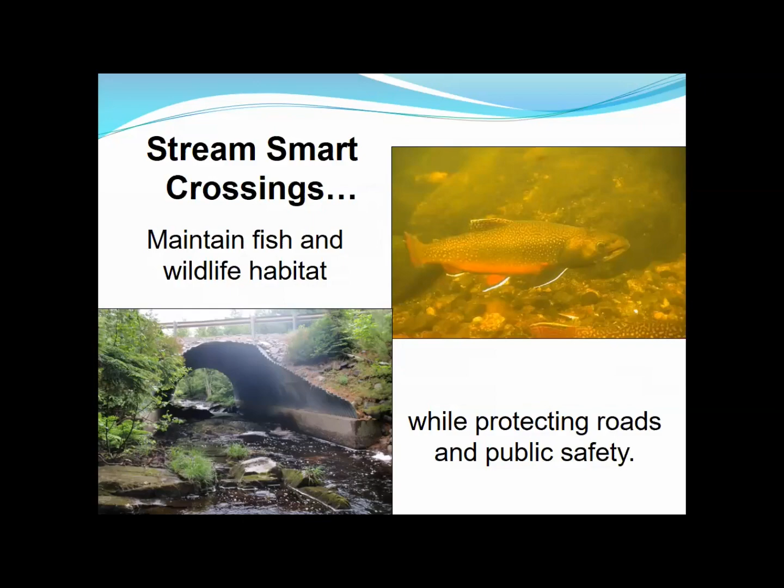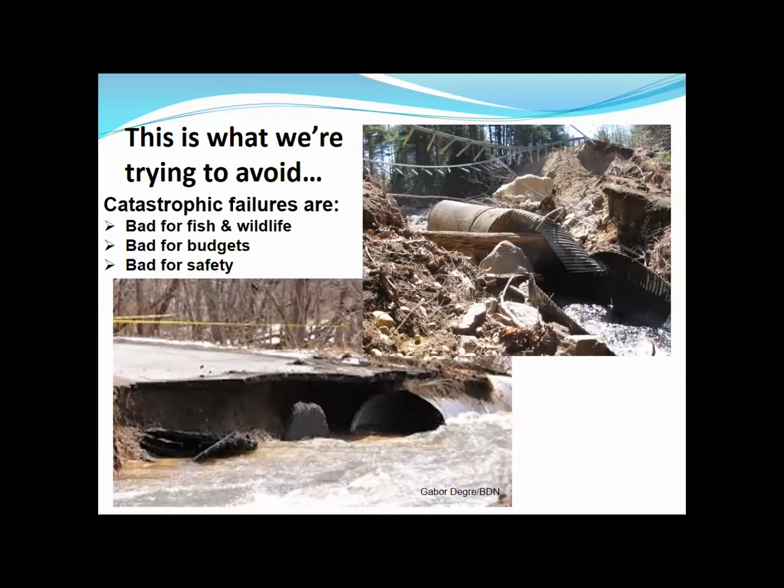By building Stream Smart road crossings, this is what we're trying to avoid. Obviously, road failures like this are bad for fish and wildlife, they're bad for budgets, they're bad for public safety. And unfortunately, the likelihood of failures like this is increasing as large annual storms become bigger and occur more frequently over time.

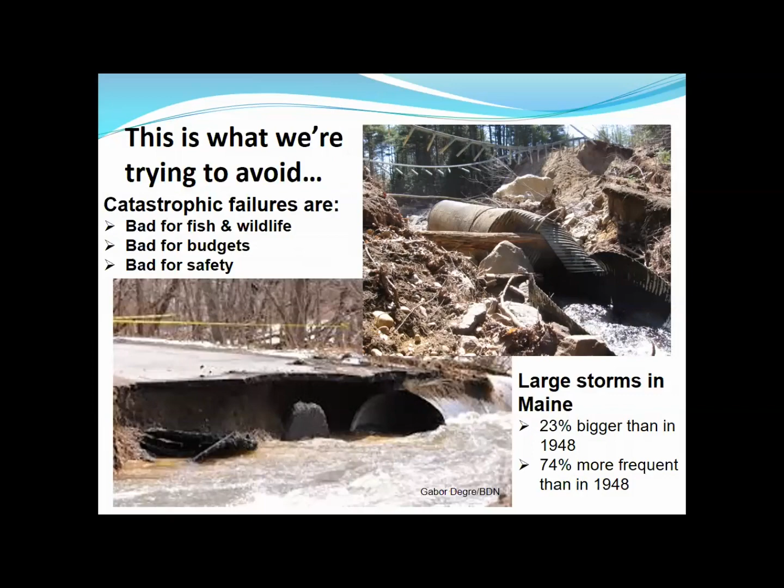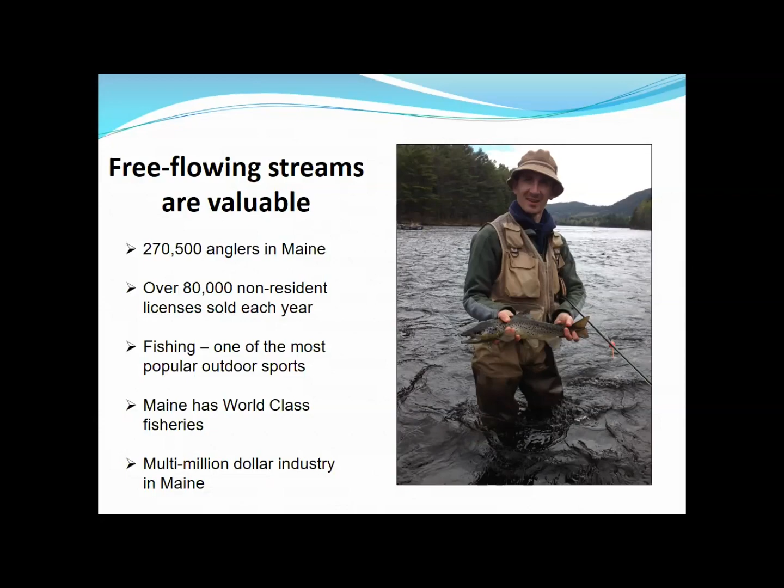Besides avoiding catastrophic road failures, Stream Smart crossings can help us restore free-flowing streams. And free-flowing streams are important for a number of reasons, one of which is fishing. Fishing is one of the most popular sports in the nation, and Maine has world-class fisheries. People travel here specifically to go fishing. Fishing is a multi-million-dollar industry in Maine.

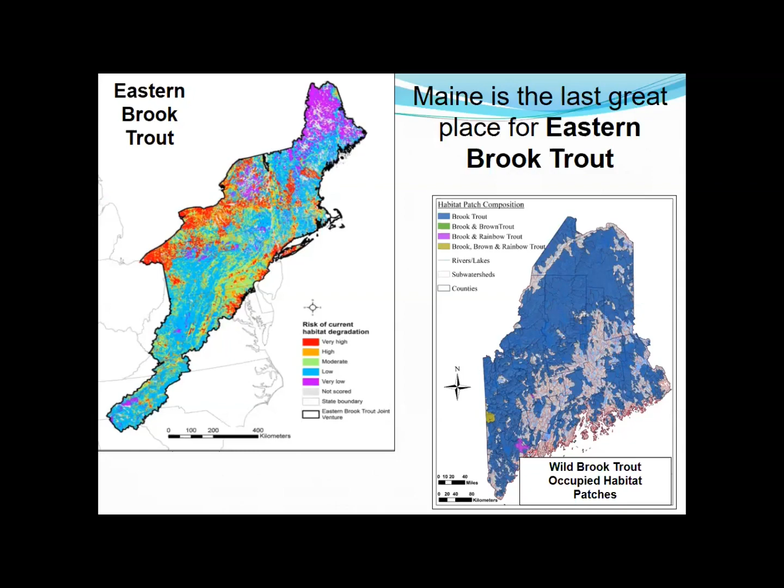Born and raised in cool freshwater streams, this fish travels thousands of miles out to sea, where they then feed off the coast of Greenland for a couple of years, and then they return to the very streams where they were born, but now they've come to spawn and reproduce, which just goes to show that fish need to move.

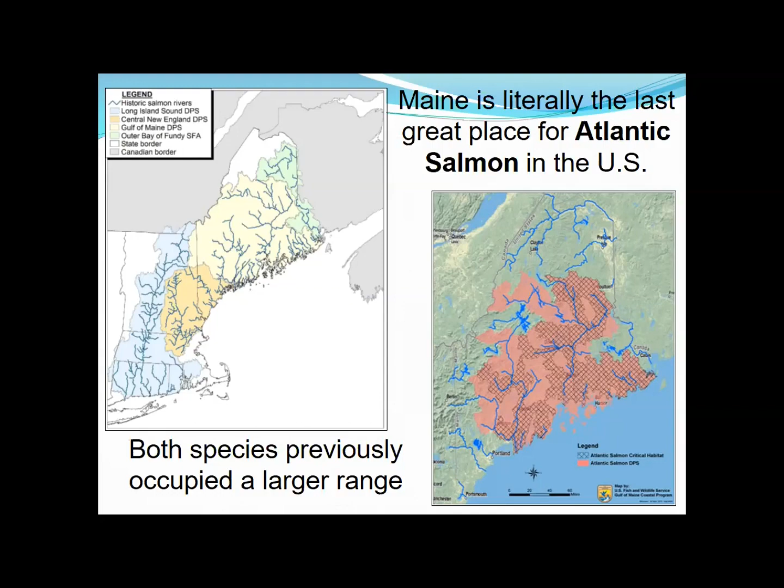Fish of all species need to move. They need to move daily, they need to move seasonally, and they need to move throughout the different life stages that they go through. Daily, they need to find food, they need to find shelter, they need to find areas of rest. Seasonally, they need to be able to find cool streams where they can go to escape the heat and the low flow areas during the summer months. And they need to be able to find deep pools where they can overwinter without freezing.

Throughout their lives, they occupy very different areas. When they're small, they're in small streams where larger fish can't prey on them. And as they age, they move out of these smaller streams and take advantage of other available habitat as they grow. They may travel fairly far from where they were born, with fish like salmon traveling all the way out to sea and back again. Because of this intrinsic need to move, connected, unfragmented streams are critical for their very survival.

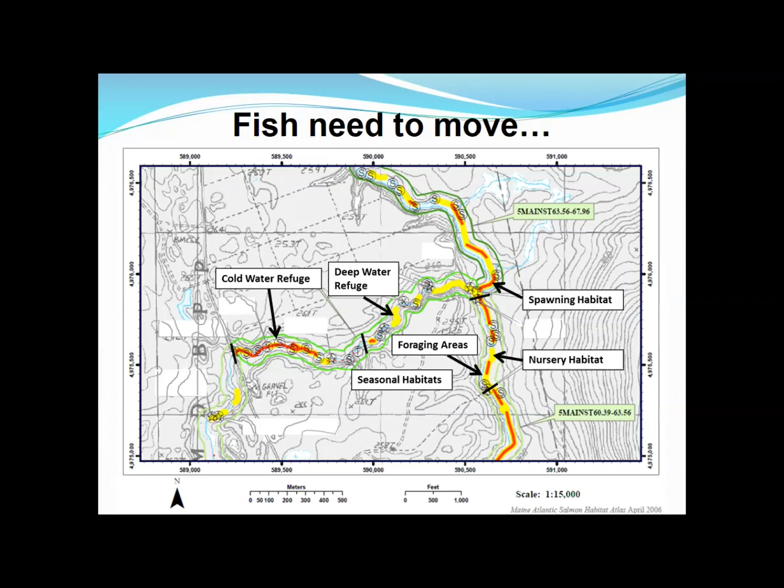But free-flowing streams don't just benefit fish. They benefit everything that supports the fish, like invertebrates and microorganisms. They support the organisms that might feed on the fish, like fishers. And they benefit other species that rely on the streams. Freshwater mussels filter water and provide food for other organisms.

Terrestrial species often use stream corridors and riparian areas as their travel corridors. And when they reach a road stream crossing that does not allow passage, does not allow them to go through, they often end up, their only choice is to go up and over the road. And it is often, the result is disastrous for them.

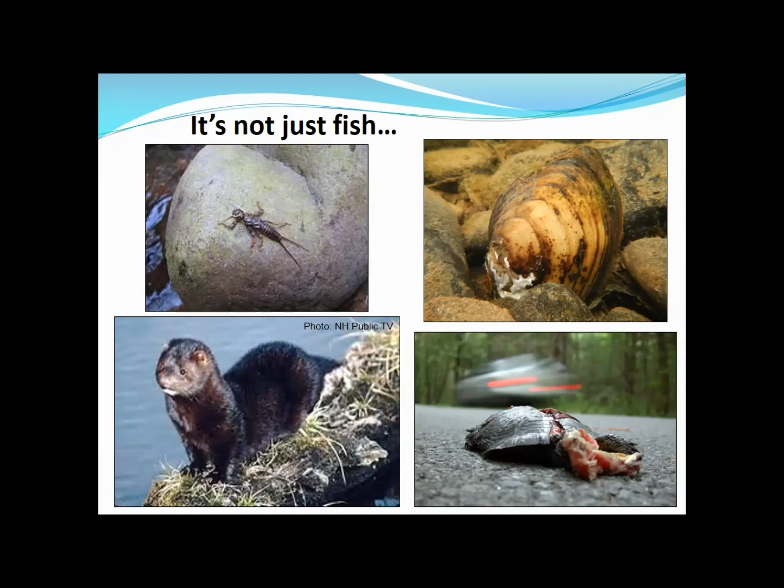But it's not just about the critters, it's also about the functions of the stream, what the stream does. A free-flowing stream regulates the flow of water, which helps mitigate storm flows and flooding events. Free-flowing streams also maintain water temperatures. A free-flowing, shady stream is cooler than a slow-moving, sluggish body of water.

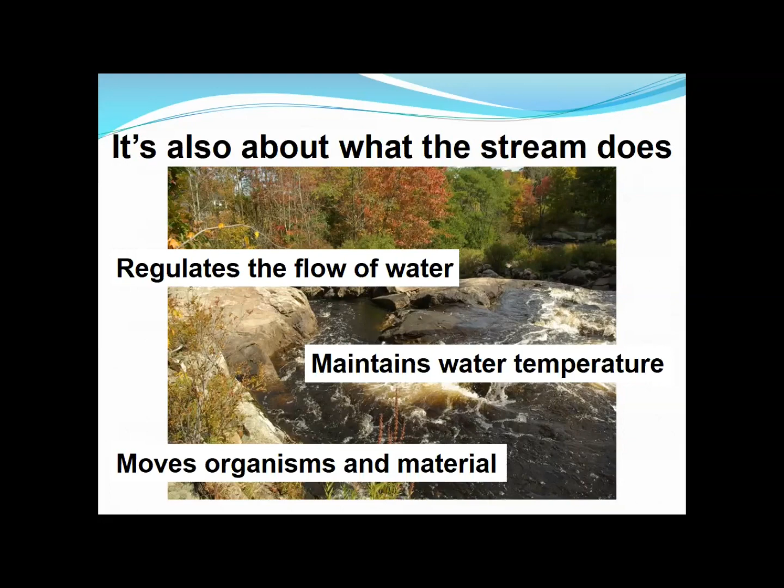And that cooler water holds more oxygen, which is good for all sorts of aquatic species. Free-flowing streams also move materials: boulders, sediment, root wads, trees. They all move when we have large storm surges, and when the stream is free-flowing, those materials are deposited out and distributed throughout the system as the water moves. It's these structural elements that create the best habitat for fish and other aquatic organisms.

So we've covered why free-flowing streams are important. What's the problem? The problem is barriers. We tend to think of dams when we think of barriers to fish passage, and they are a huge problem. But there are more road stream crossings acting as barriers than there are dams on the landscape.

Culverts have traditionally been created from the road perspective - we're trying to move water through a road. We're trying to change the way that we think about that and try to think about it from the perspective of the stream, as a road crossing a functioning stream. Stream smart designs can meet our transportation needs and still allow the stream to flow freely and allow fish and wildlife to move.

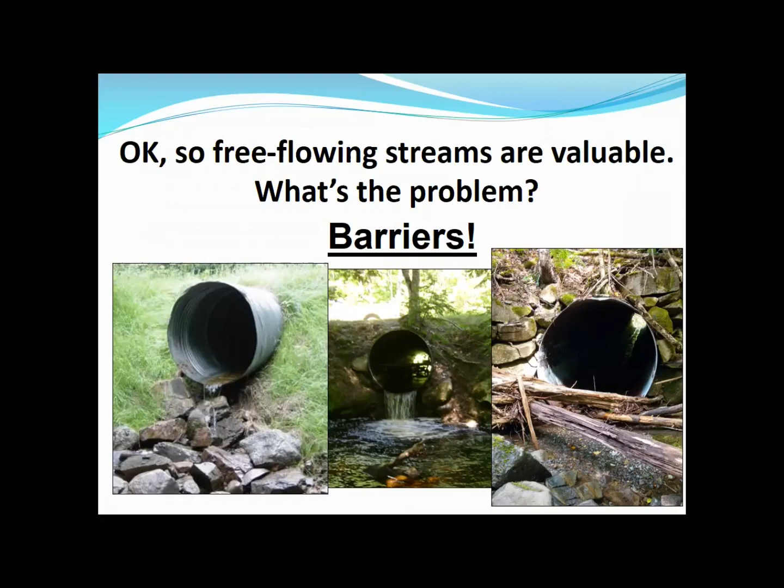So how do culverts block fish passage? There are three basic problems. The first is that they can create high flows - the water can flow too fast for fish to swim through, and this can happen either through undersized culverts or culverts that are set too steeply.

The second problem is that you often end up with water flows within the culvert that are too shallow for fish to move through. This can happen when the culvert's set too high and it acts like a dam, and not enough water can actually get in and get through the culvert.

And finally, the culvert itself can create a physical barrier to passage, either with a perched or hung culvert, where the outfall of the culvert is set well above the stream bed, or it ends up above the stream bed, or the inlet on a too small culvert can become easily blocked by debris or by beavers, or the culvert can actually create a thermal barrier to fish movement.

When that culvert is set too high and acts like a dam, it creates a backwater behind it. That water kills the trees, so you have less shading. You have siltier, smaller substrate settling out on the bottom of the water. That water heats up because it's not moving.

And if it reaches temperatures that are too high, then cold water species like brook trout and Atlantic salmon can't function in those temperatures. They won't even go into it, even if they have access through the culvert. So you create a physical barrier based on the temperature when the crossing structure is set improperly.

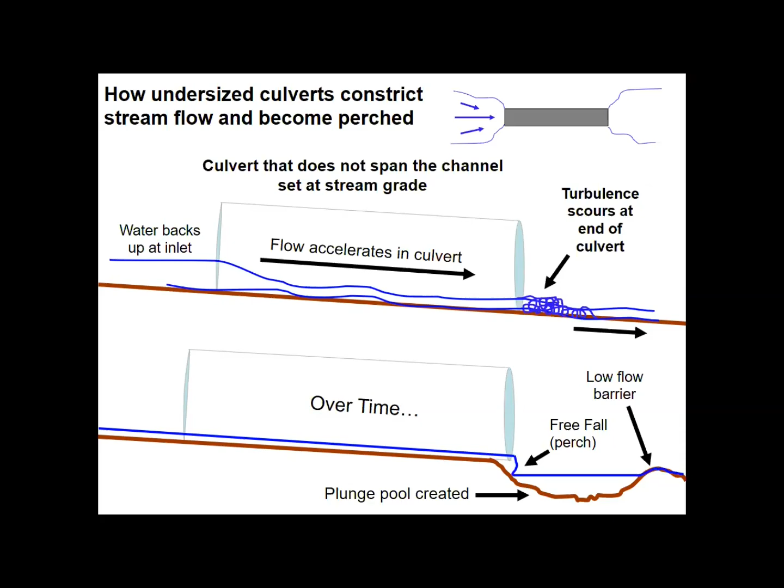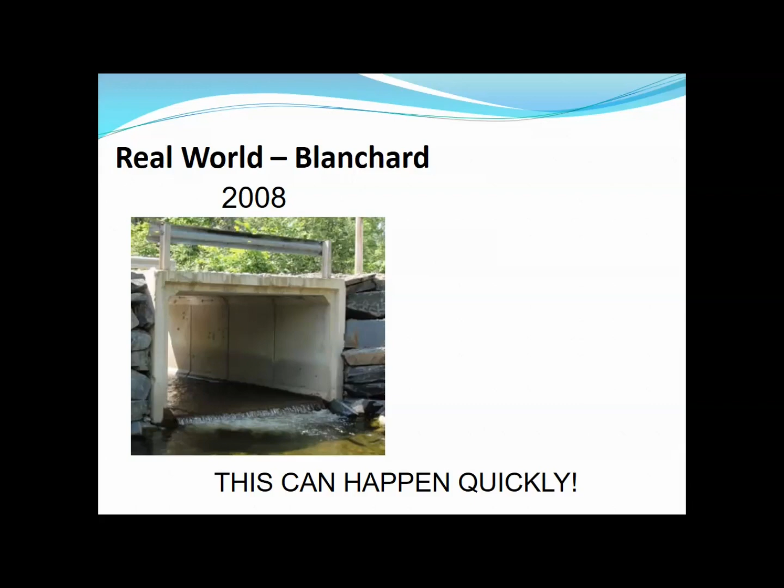And it can happen quickly. This is an example of a crossing structure in Blanchard. It's a concrete box culvert, and it was put in the mid 2000s. A few years later, it already had a perch developed. Two years later, that perch was dramatically larger and creating a barrier to fish passage. You'll also notice inside that box culvert there's no channel, so the water sheets across the concrete, making it too shallow for fish to swim through.

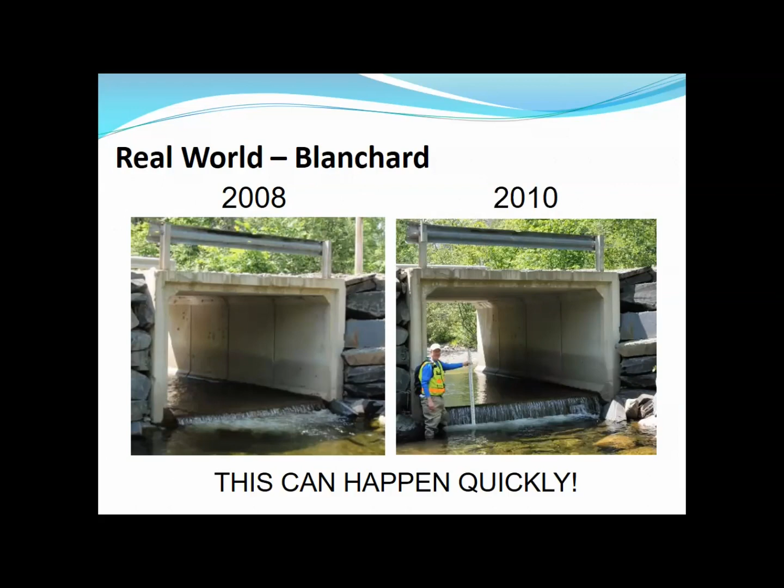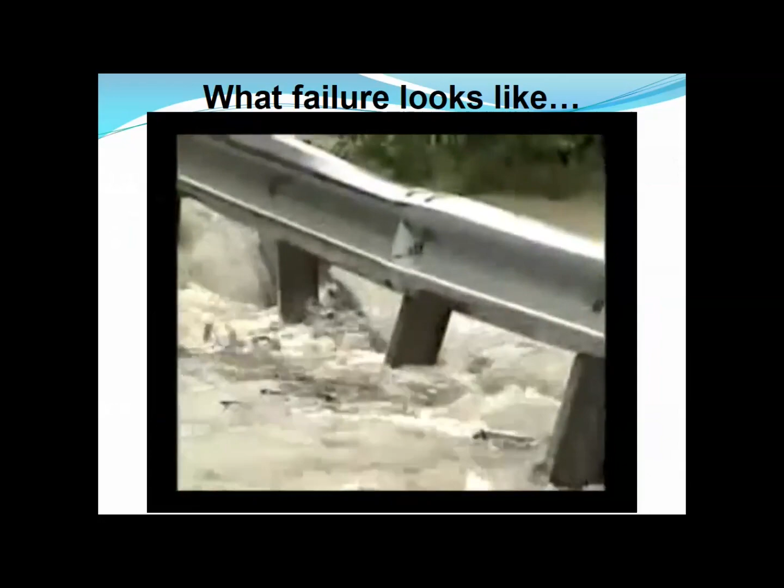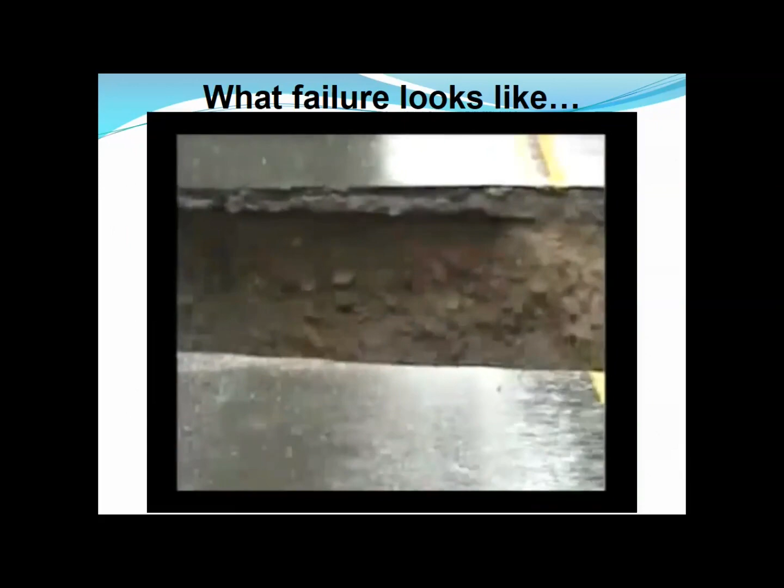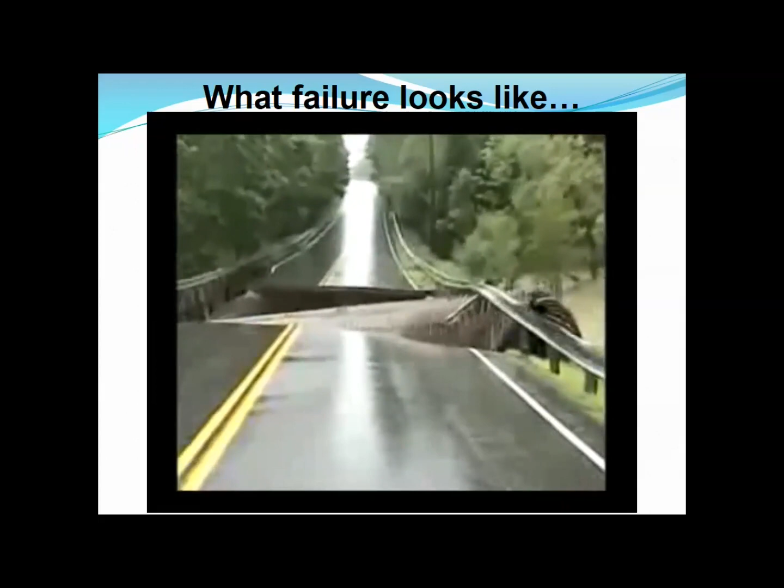This can happen very quickly, and this is what failure looks like with a real example. This is a road crossing failure in the town of Freeport in 2008. It's an undersized culvert - there's a large storm event, debris blocked it, and you can see what happens next. Here's the culvert coming through the opening.

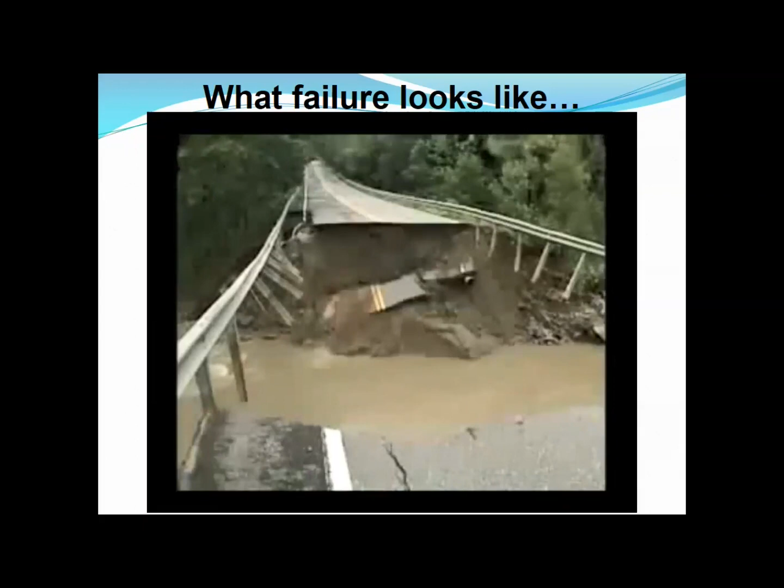This is what we're trying to avoid. And fortunately, we have the tools to reduce the probability of that happening. There are things we can do. Stream smart crossings can maintain fish and wildlife habitat and also protect roads and public safety.

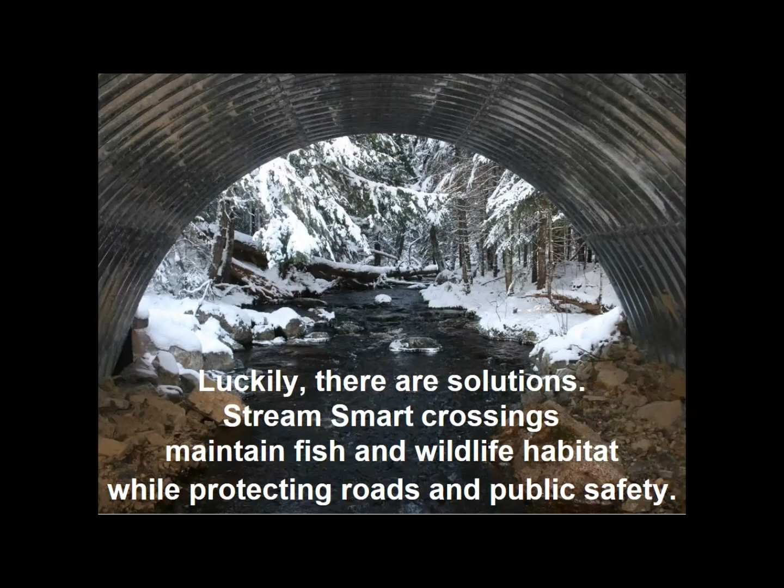In this photograph, you can see the naturally flowing stream going right through the culvert, the crossing structure. You even have dry banks on the sides, which allow wildlife to pass without having to go over the road. It also creates enough capacity for those larger storm events, which is a good thing because there was a 50 to 75 year storm event in 2010, right after this crossing was put in.

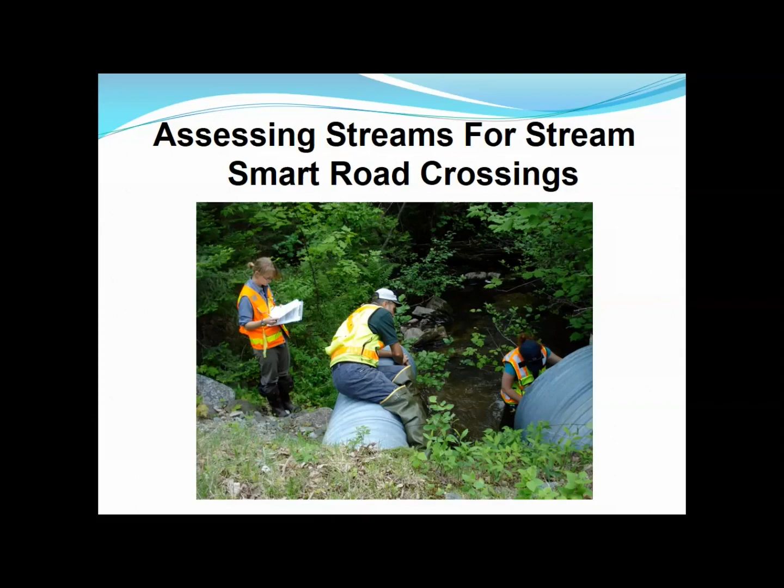So how do we know if our crossing is Stream Smart? What features should we look for or include in our own designs when we're trying to create a Stream Smart crossing? We tried to boil it down to the most important points for Stream Smart outcomes. If your project meets these criteria, then you probably have it right. These are indicators of success. The specific structure type that you use to achieve these goals doesn't matter as much as really hitting these goals.

You need to use what's best for your situation. A forester on a spur road would use something different than what's used on a busy road downtown in a municipality. But if we follow these rules of thumb, we'll pass the floodwaters, the fish, and the sediment that we need to. So we narrowed it down to the 4 S's: span the stream, set the elevation right, make sure the slope matches the stream, and make sure you have substrate in your crossing. So let's run through them.

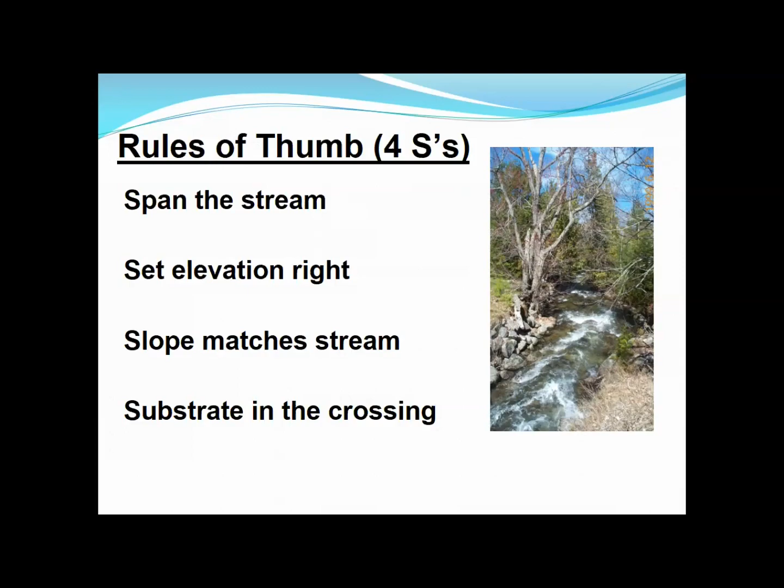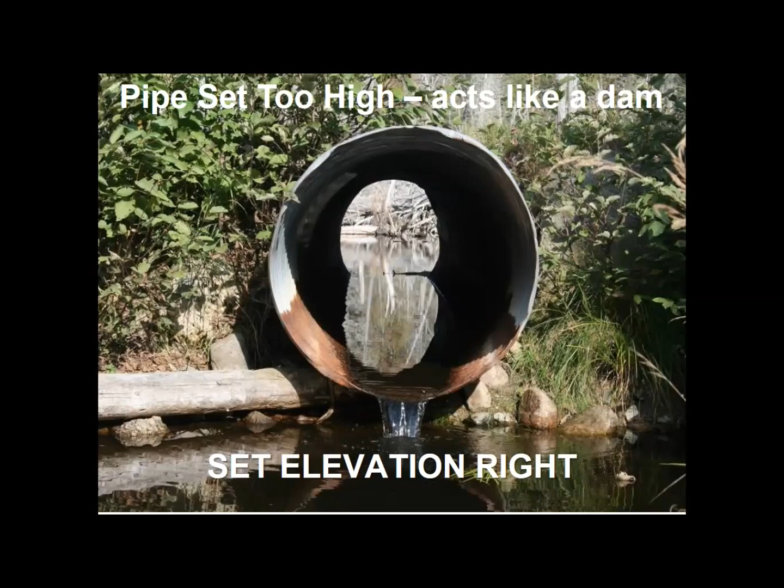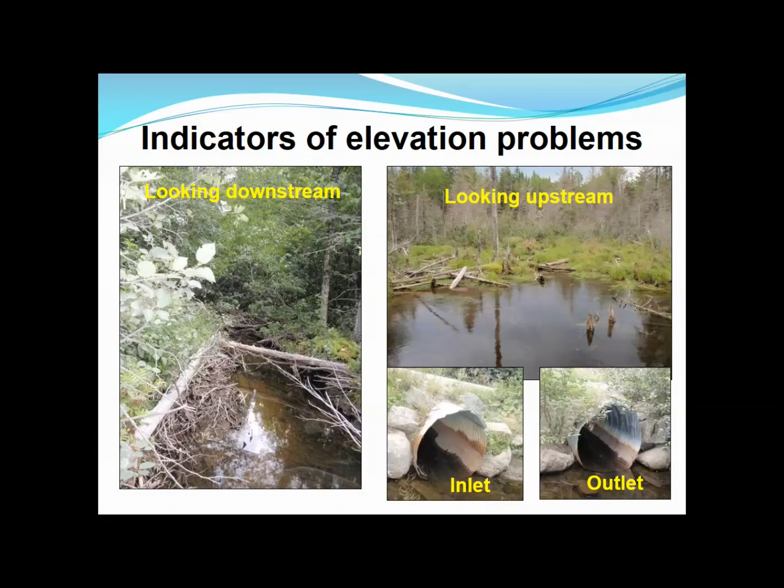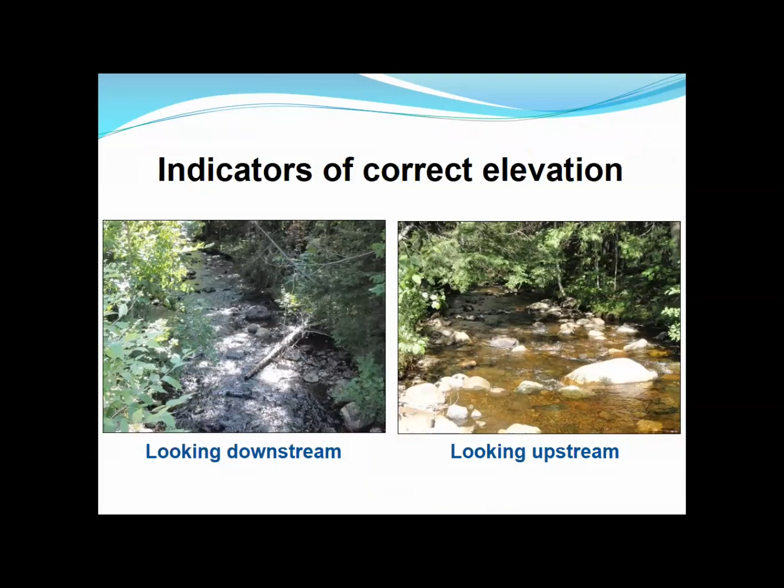You set your elevation, or determine your elevation, by doing a stream profile. You have to actually go out and take measurements. You cannot use estimates or modeled numbers. You need to actually collect some data.

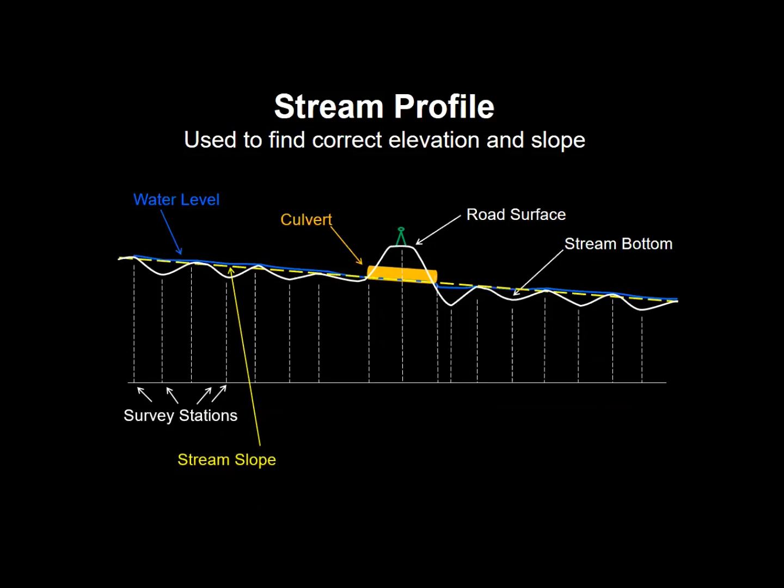So what you do is go out to the stream and measure the high points and the low points, going up and down the stream, above and below your crossing structure. When you connect the dots of the high points, you get your stream slope. And when you collect the low points, you can find the elevation.

Notice you can sort of ignore the plunge pool at the outfall of the culvert, because that's an anomaly created by the crossing structure. That's not a normal scour depth that the stream would normally have. So the low points are the natural scour points, and you want to make sure your new culvert is large enough and set low enough to be below the natural scour line.

If it's set too high, the stream can scour out from under your culvert.

We actually walk through this in our StreamSmart Phase 2 trainings. They're 2-day workshops, usually held in the fall, where we take you out to a stream and you actually collect these data points and put them into software to create a preliminary design. So you actually get to try it out.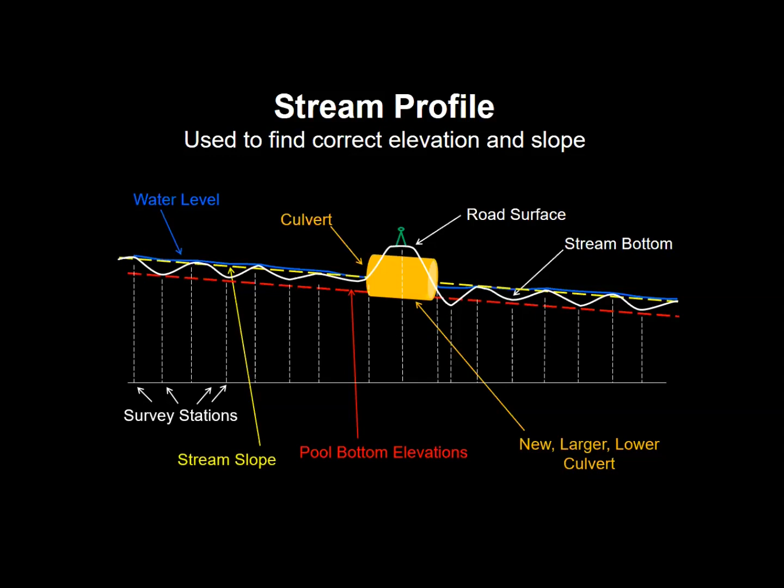If you're interested in getting some practice with that, sign up for some of our Phase 2 workshops in the fall. You take the data and put it into a program that can calculate these, but you can also just use graph paper to get these elevations and slopes as well.

The third S is to make sure the slope matches the stream. You want to install culverts so there's no change in the stream bottom at the inlet and outlet, so you have seamless inlets and outlets. You don't want a lip or a dip - you want it to be the same coming in and going out. Like with elevation, you're trying to mimic the stream in the slope you set for your crossing structure.

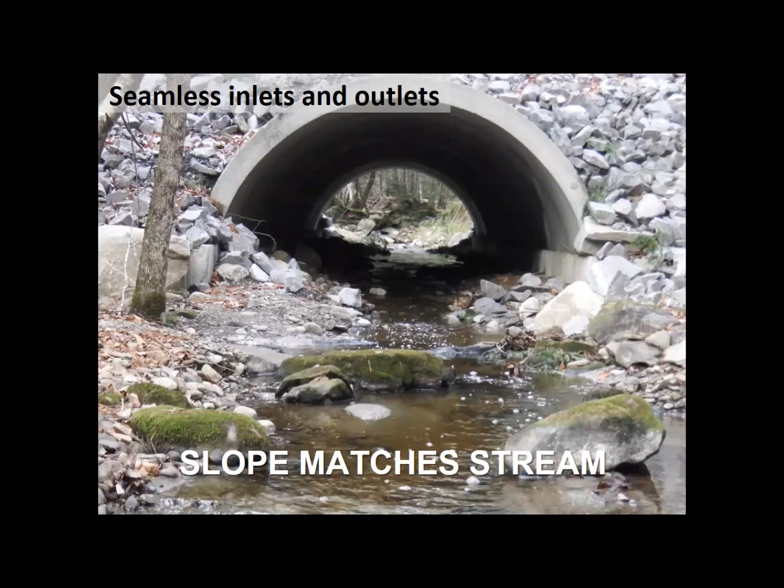Finally, you want to make sure there is natural substrate in the crossing. Substrate is the material that lines the stream bottom - it's boulders, cobble, gravel, could be sand. Whether it's the existing substrate in an open bottom crossing or substrate you've added to an embedded structure, StreamSmart crossings need to have substrate.

This maintains the natural rate of flow of the stream, helps oxygenate the water, and provides habitat to allow for fish passage. You need to make sure your substrate matches the natural substrate of the stream and is stable, because you don't want it to wash out of your crossing structure.

Here they are again, the 4 S's. If you follow these rules of thumb, you will meet the golden rule, which is to let the stream act like a stream. Remember, we're now trying to think of road stream crossings as a road crossing a functioning stream, as opposed to water being pushed through the road.

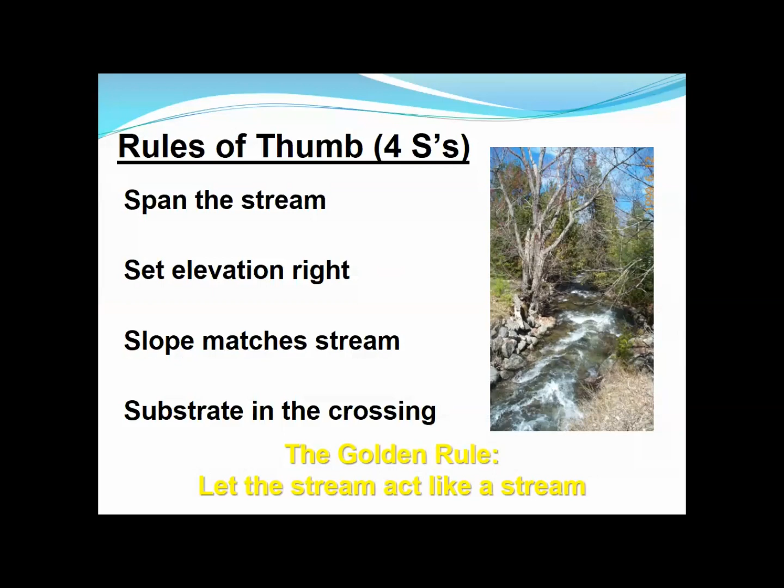So we've got concepts we want to aim for to create a Stream Smart crossing, but how do you go about it? What are the steps? How do you actually design a Stream Smart crossing? Well, there are 2 basic steps to get you started: the field assessment, where you collect the data and all the information you need, and then the project design, where you plug the data in and come up with your design.

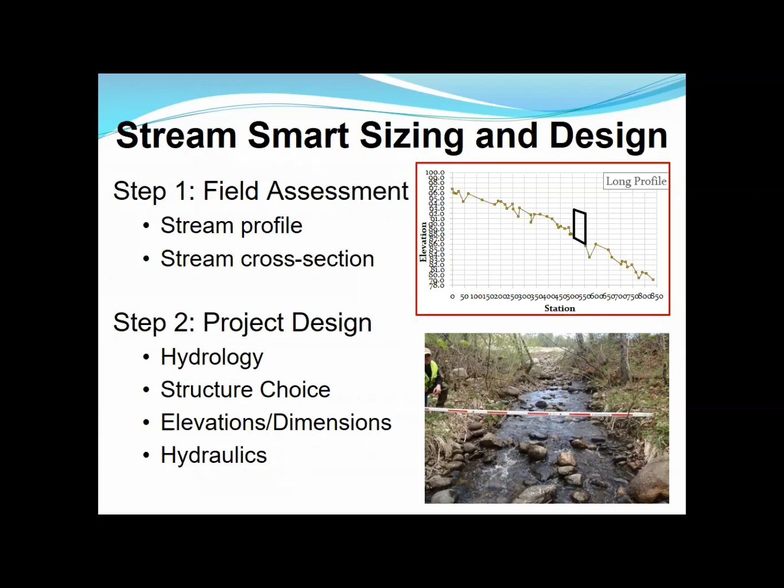But we need to start by asking some basic questions so we know our goals. You need to start by figuring out the volume of flow you're designing for. Traditionally, culverts were sized to meet 25-year flows. Folks are moving away from that, and some regulations require you to go beyond that. So ideally, you want to be designing to meet a 100-year storm event. That's the flow you want to aim for.

That will protect your infrastructure for the long haul, make sure you have capacity for storms, and allow for fish and wildlife passage.

We also want to think about what species we have in the system. Is this project going to benefit fish passage? Are there other species we need to be thinking about that are of interest in the area? This is a great time to reach out to your local natural resource agency, like the Department of Inland Fisheries and Wildlife. They can tell you what fish are in the system, if this is an important fishing resource, or if there's habitat for state-listed species or other targets.

Communicate with your natural resource agencies. If you are putting in a Stream Smart crossing, they want to help you do it, and they will provide you with information to help you do that.

In addition to talking to agencies, there are other tools you can use to gather information before you go out in the field and understand what's going on at your site. One of them is the Maine Stream Habitat Viewer.

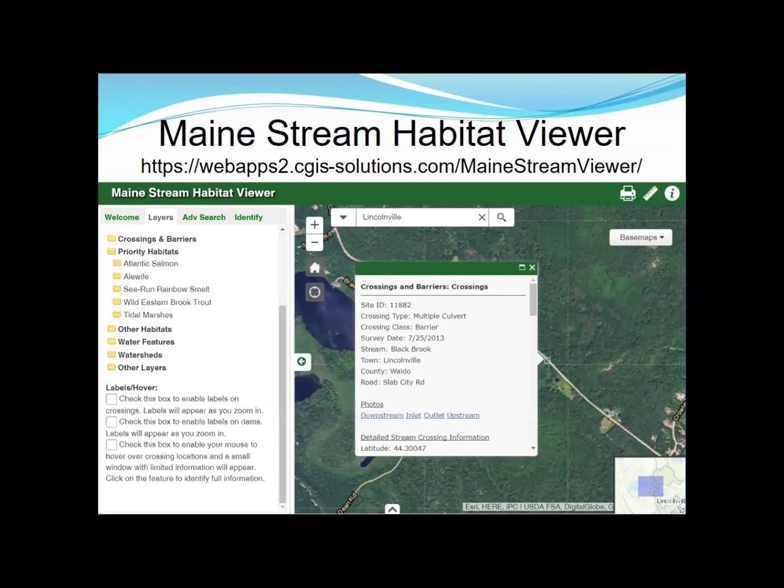This includes photographs of the inlet, the outlet, upstream, downstream, and some estimates of size and types of crossing, ownership, etc.

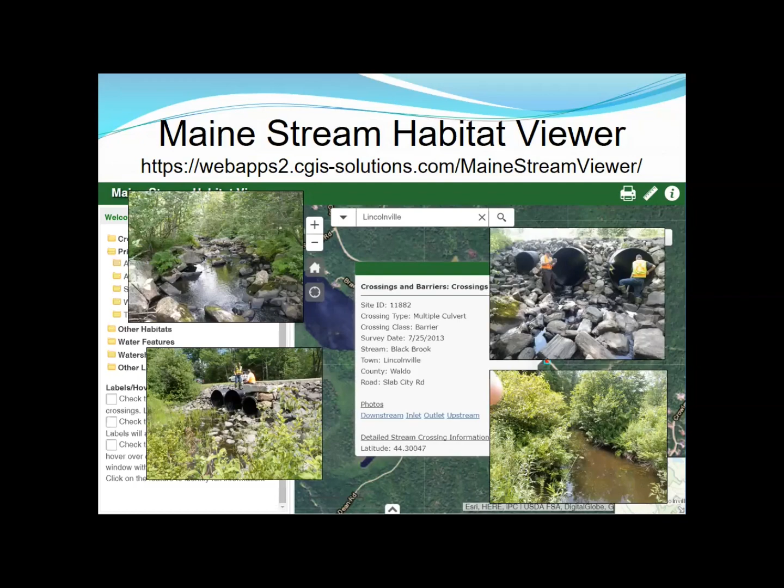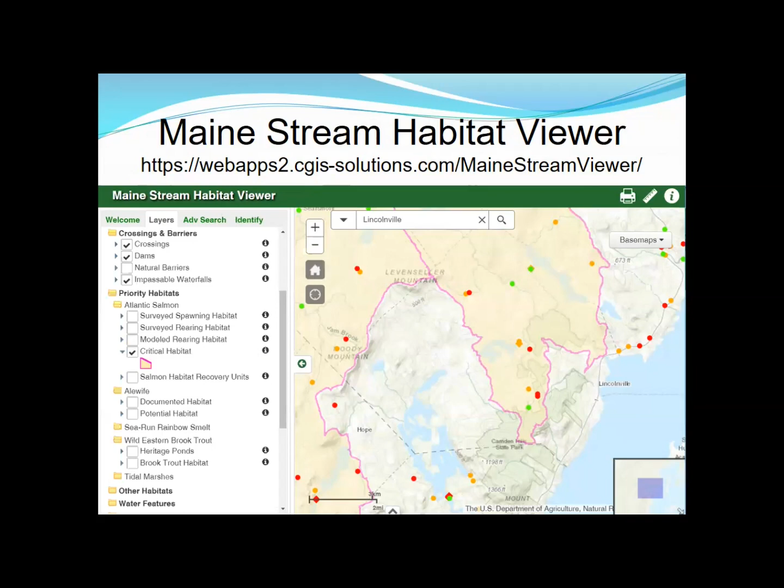Over on the Layers tab on the left-hand side, you can find information on the natural resources in the area by, for example, turning on where the critical habitat for Atlantic salmon is, where habitat for alewives is documented, or where we have brook trout habitat, among other things.

For crossings that haven't been measured or where site-specific data are missing, or if it's a private crossing near another public crossing, you can use the same map to zoom into the area where you know the crossing is, and you can still gather information on the natural resources. You won't have the survey-specific data, but you can get some of that natural resource data for the area in question.

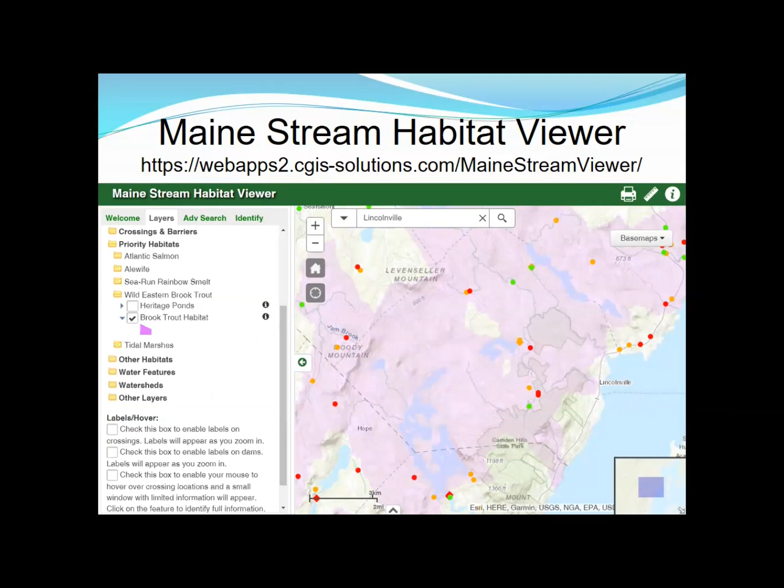The Advanced Search tab on the left-hand side allows you to pull all the crossings within your town or watershed into a table that can then be exported into Excel or as KML files so that you can bring them into GIS, or CSV files as well.

You should also check out StreamStats for your site before you head out into the field. You can get an idea of the size of the watershed that flows through your crossing structure. There's also an estimate of the bankfull width, but don't rely on that number. They're estimates created through software models, and they're really not terribly accurate, particularly for smaller streams, but it can give you a general idea of what to expect when you get out there.

The viewer also has estimates of bankfull widths using a different model, so those numbers should again just be used to give you an idea of what to expect. You have to collect data—you have to actually measure the stream to develop your Stream Smart design.

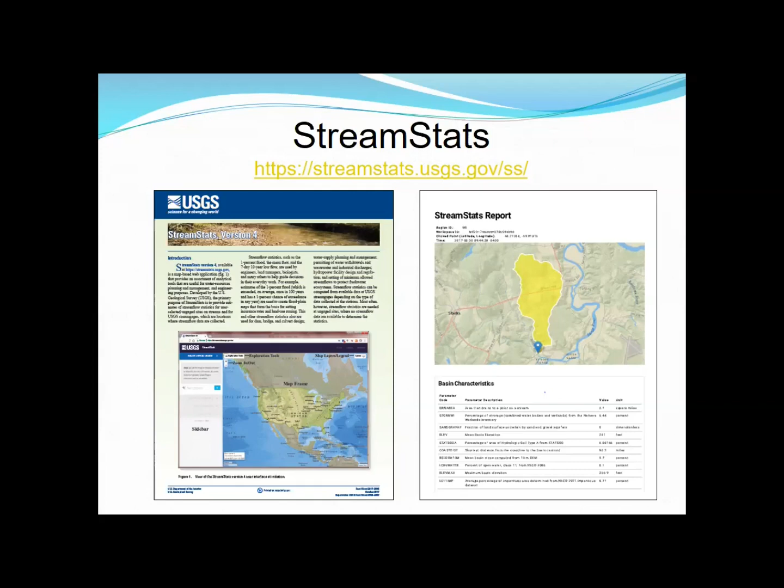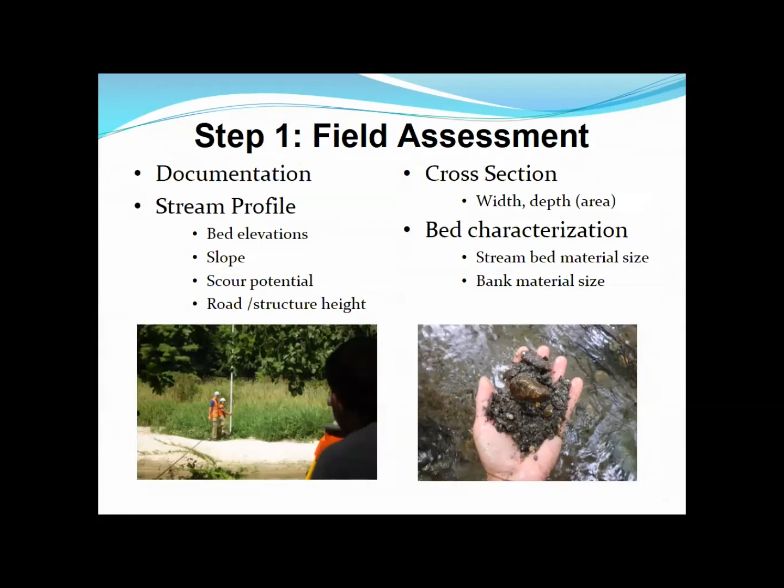And that's what you do next. We've done our preliminary work, we've done our desktop work. Now we actually need to go out into the field and collect data. In the field, you're going to start collecting the data you need to create that longitudinal profile, where you'll get your slope and your elevation. But you need to collect all those points along the stream.

But you have to remember that the crossing structure itself affects what you're going to find near that culvert. It's going to mess it up. So you're going to need to move away from that structure. You don't want to take all your measurements right near the crossing structure because it's been altered and affected, and you're not going to get a true picture of what that stream is supposed to look like. You're going to get a picture of what that stream looks like when it's been impacted. So you need to get away from that crossing structure.

And the rule of thumb is to go 20 to 30 times the width of the stream in distance away from the crossing. So for example, if you had a 10-foot wide stream, because you're going to measure that, get your actual bankfull width. If you have a 10-foot wide stream, you're going to have to go 200 to 300 feet down the stream and measure, and up the stream and measure.

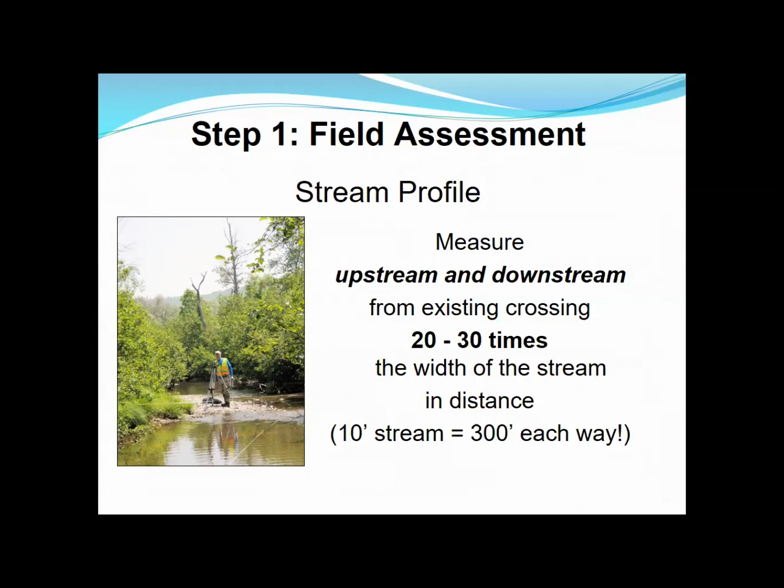And that will give you a representative reach, an area that is unimpacted by that crossing structure, to take your measurements and get a good slope and a good elevation. And you're going to collect a lot of measurements all the way through your crossing structure. And if you take good measurements in stretches outside the influence of that crossing structure, you can create a good design.

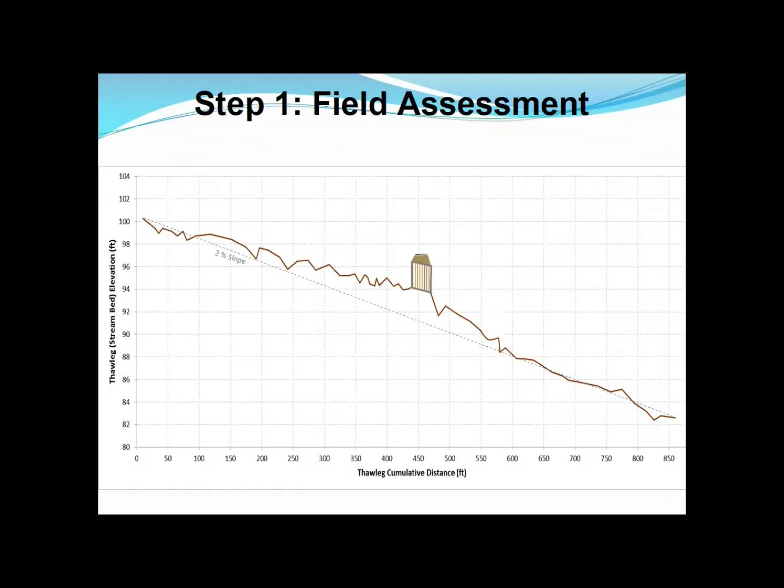This is a bit of an extreme example where there's extensive sedimentation, both up and downstream of the culvert itself. The old way would be to look right around the culvert and decide what your elevation and your slope is. If you do that in this example, you will simply continue the problems that this site had for decades. You're not going to be fixing the problem at all.

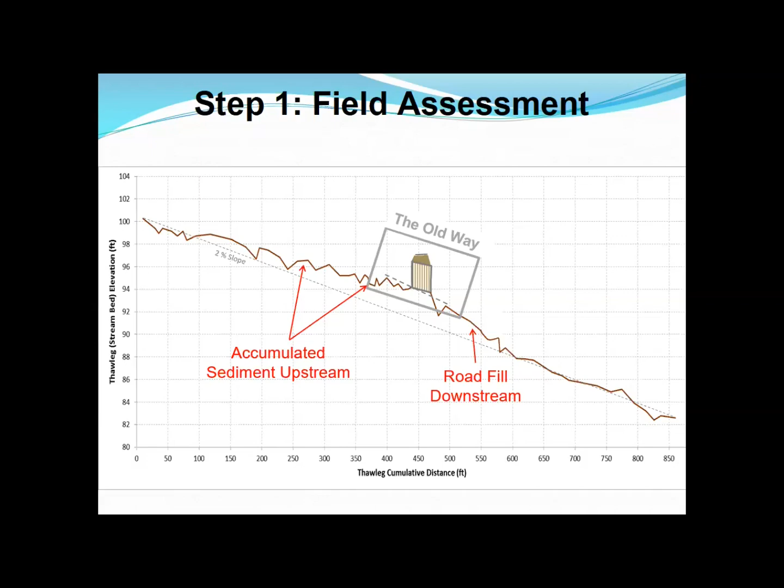Even if you made a bigger crossing structure, you're still setting your slope and your elevation wrong. What you need to do is go all the way out to where an unimpacted reach was found above and below, and look at what the true slope and the true elevation is for this crossing structure, for this site. You can see it's a very, very different slope and elevation than you got if you looked just near the crossing structure.

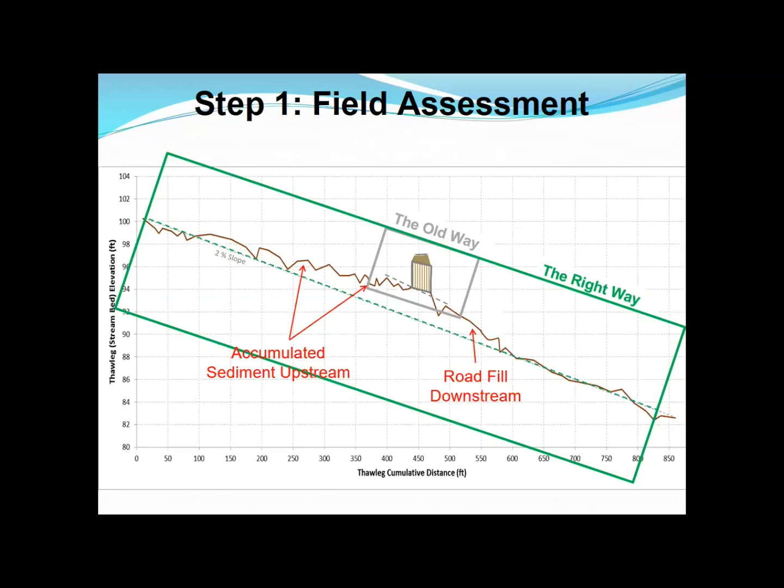You'll also need to look at the cross section of the stream, not just up and down, but across as well, and look at the cross-sectional area. Again, we want to not be taking these measurements right near the culvert, so you're going to want to do that down in the representative reaches, both up and downstream, so that you're getting a really good picture of what's actually happening in an unimpacted stream.

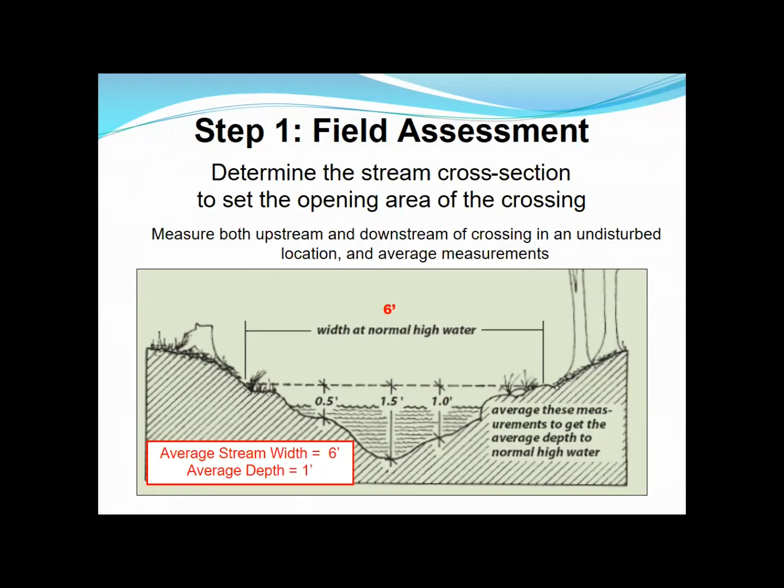When you do this, you need to pay attention and make sure that when you're taking a cross section, you pay attention to any major tributaries that are coming in, and make sure that you capture all of that, that you're not measuring before those tributaries come in if you're up above, or after or down below. So you really want to make sure that you're getting a representation of the cross section of the actual stream that's going to flow through your new crossing structure.

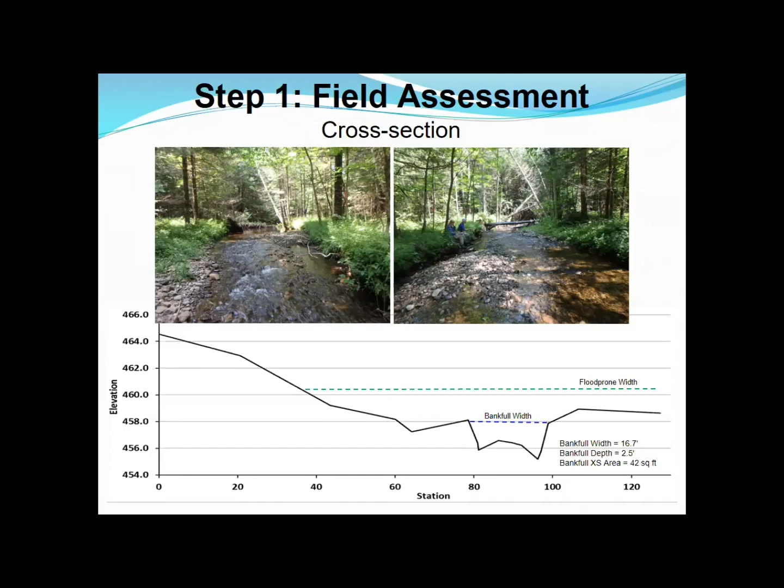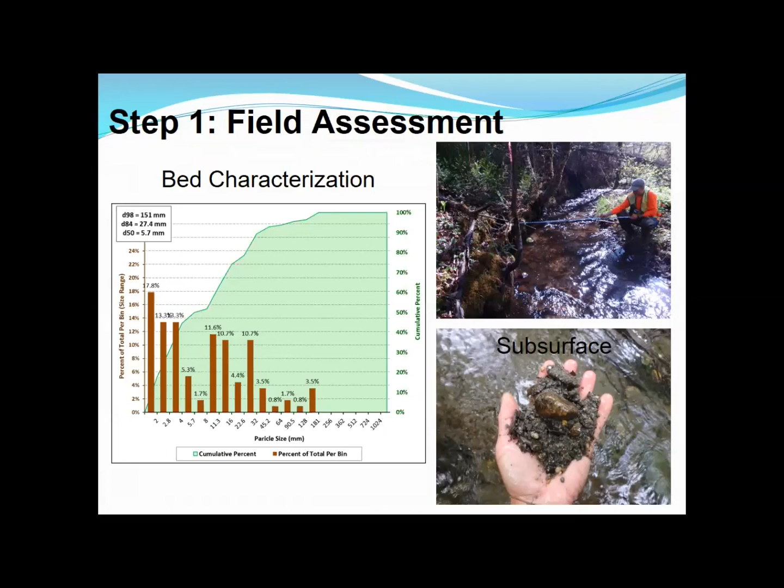And with these measurements, you can actually map out the cross section of the stream and look at it on a map for use in your calculations. And finally, you're going to want to characterize the substrate, because you're going to want to recreate that stream bed inside your new crossing structure. You want to get a feel for the distribution of the different sizes and types of substrate materials so that you can recreate that inside your structure.

So now you've done all the legwork, you've done all your field work, you've collected data on your actual stream, and now you're going to go back inside and do your project design, your preliminary project design. You're going to take your data and start plugging it into some software, or even just graph paper, and start getting a feel for your stream.

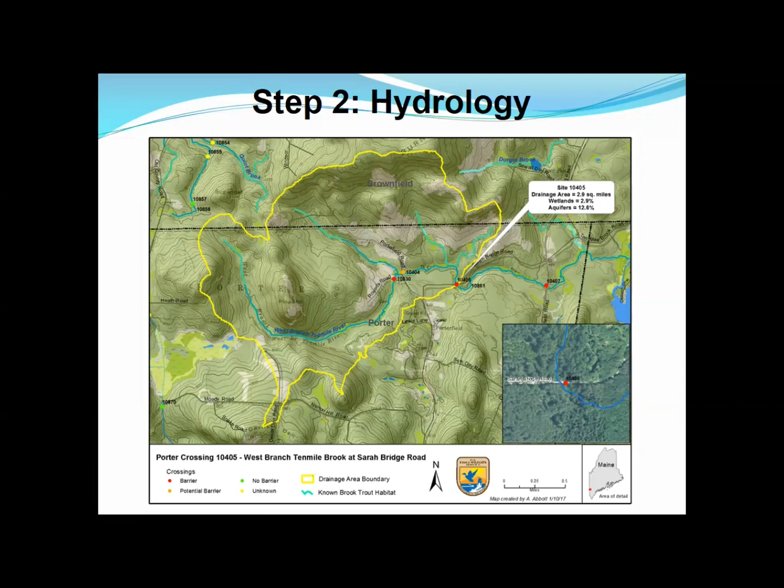And so you also want to go back to StreamStats and do a hydrologic analysis so that you can understand what flows to expect at your crossing, now that you have the information to help you determine what size crossing. There are a number of different ways to do it, but StreamStats is the easiest. It's put out by USGS. It's online, it's free, it's pretty straightforward, and it does a pretty good job. It just spits out the statistics that you need.

Once you know how much water is flowing through your crossing, you'll need to test the capacity with some hydraulic modeling to see what the discharge is going to be at different events, a 100-year event versus a 25-year event.

HY-8 is sort of the standard these days. It's developed by the Federal Highway Administration, and it can show you how your design will perform under various flows: a 25-year event, 50-year event, 100-year event.

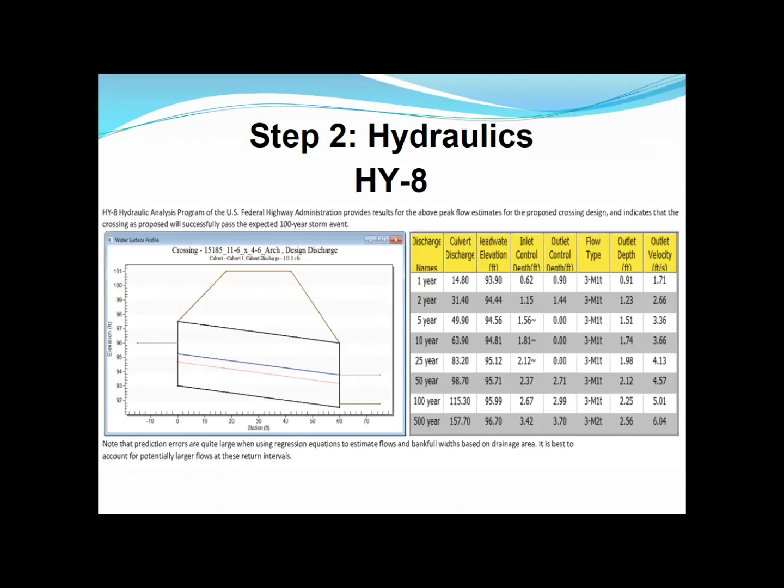There are a lot of different options you can use to put in your Stream Smart crossing. You can choose the best one that fits your site and your budget. There are bridges, arches, three-sided boxes, embedded culverts. You can make that determination as long as you are meeting those 4 S's and being true to your data. You have different options for each site.

With embedded culverts, you do need to remember that because you are going to fill about a third of it at the bottom, you need to increase the size so that you don't lose the capacity that you need for that.

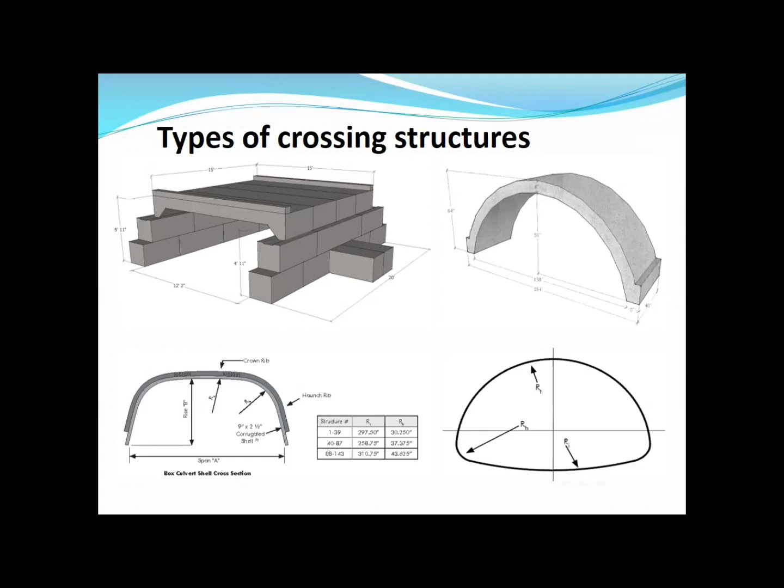Over time, you're going to actually have to do maintenance on that, whether it's clearing debris, pulling out beaver material, or adding more fill to keep the culvert in place. Over time, you're going to have to be doing some maintenance work on that, and that costs.

And again, those undersized culverts are not going to last as long. So you'll have replacement costs over time as well that you won't have with the more expensive alternative. It's expensive up front, but over time it's actually cheaper.

This was actually a study that the Nature Conservancy did, and they compared a traditional pipe to an arch structure and a box structure. The three upfront costs were dramatically different, but at the end of 50 years, the small traditional pipe was more expensive over time. You also don't have the same public safety issues with the stream smart crossings that you would have with that high maintenance small pipe.

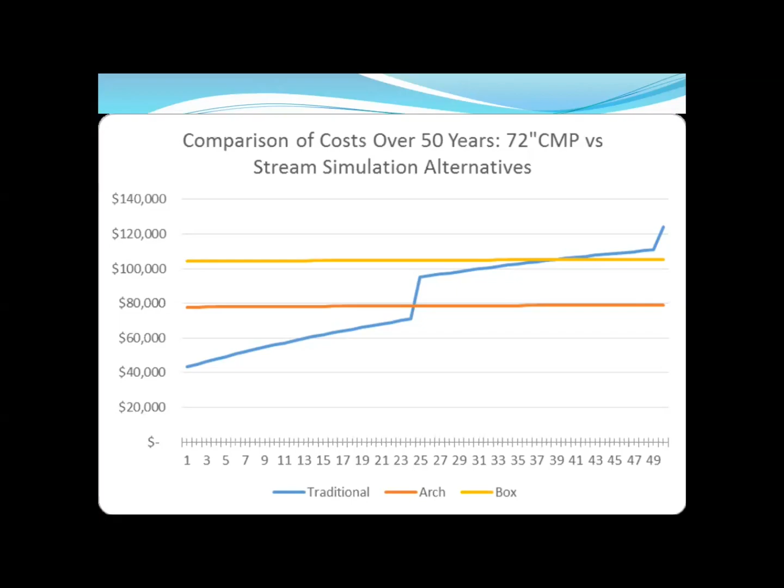So that's a lot, I threw a lot at you in a fairly short period of time. For the rest of this, I really just want to walk you through some examples and show you some real life examples of stream smart crossings, before and after, and some of the issues that came up in each of those projects.

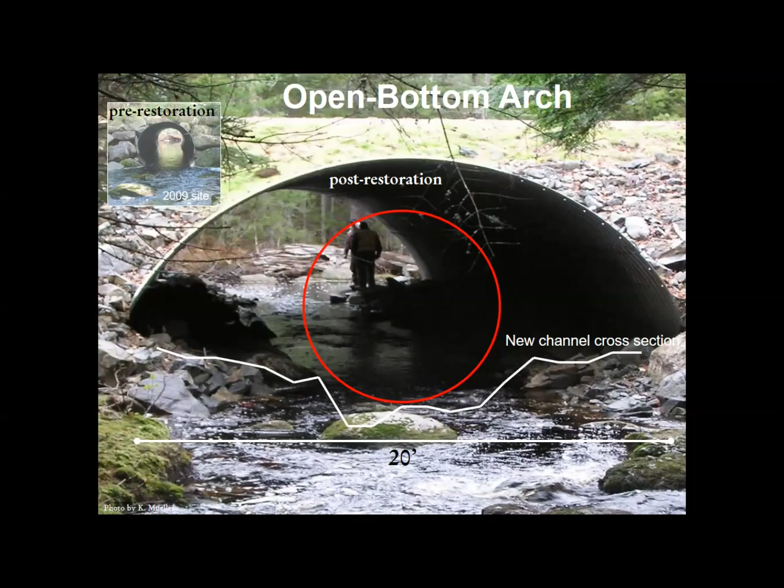The new crossing structure has a natural bed, with the substrate needed. You can see the free flowing, natural flow of the water, the elevation is appropriate, the slope is appropriate. The capacity is dramatically larger for those large storms, which we saw happened for this crossing structure. In regular flow situations, you have dry banks inside that culvert, which not only shore up the footings, but also provide dry passage for wildlife, so they don't have to go up and over the road.

This is a town road in the town of Phillips. It was a tiny 2.5-foot metal pipe, and the road was constantly failing and overwashing. They had a lot of maintenance issues and safety issues.

They replaced it with a 3-sided concrete box, or bridge, 12.5 by 4.5 feet, replacing a 2.5-foot metal pipe. It needed some more size. Because this pipe was so undersized and the elevation was so high, there was a huge amount of sediment backed up behind this crossing when they took out the old pipe.

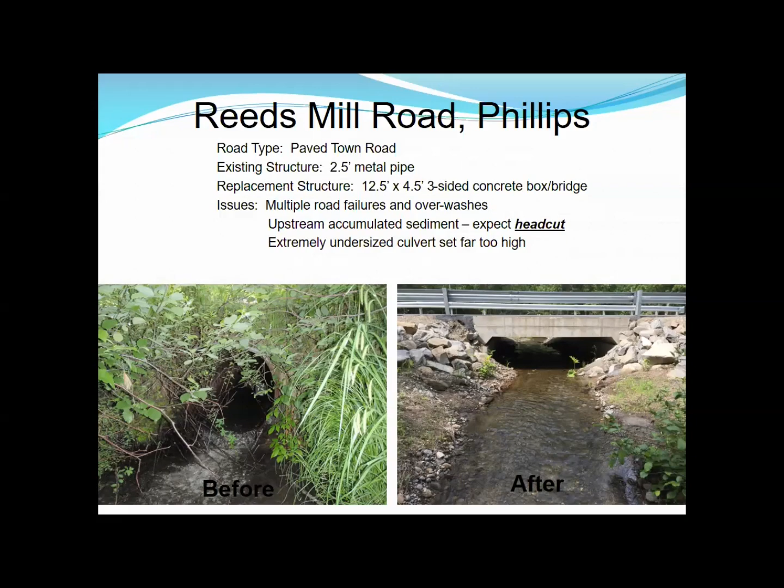So they planned for a head cut, or that sediment bank, to wash away and redevelop a natural stream bank. Within a year or two, without any disastrous effects, that sediment had moved through, and they have a perfectly lovely functioning stream smart crossing now.

Here's a diagram of that, showing the circle indicating the size and location of that previous culvert. You can see how high it was compared to where the natural stream bed was, and how small it was compared to the natural stream width. This shows the before and after in the same diagram.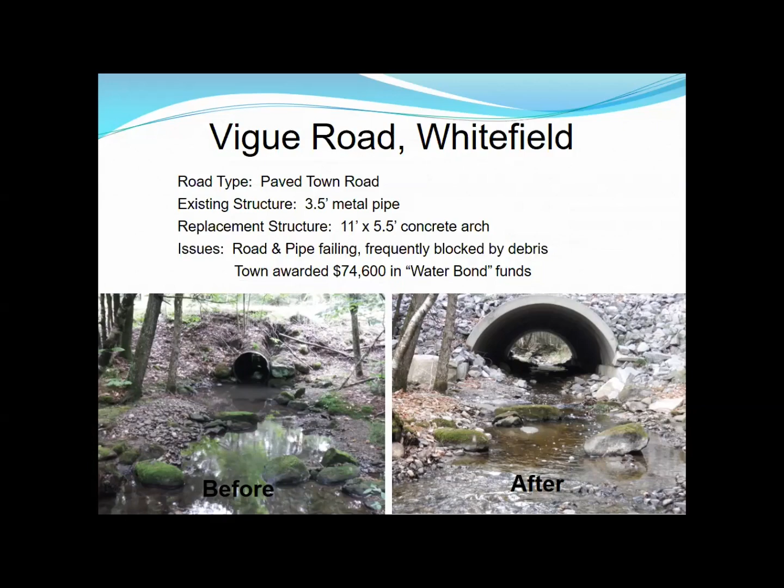This is a project that was partially funded through DEP's Culvert Grant Program. They got almost $75,000 to put towards this crossing structure. You can see in the picture on the right that you have seamless inlet and outlet, you have spanned the stream, they set the elevation right, the slope matches the stream, and there's substrate in that crossing structure. This is a perfect stream smart crossing.

Here's another project that received funds from the DEP Culvert Grant water bond funds. This one's a little bit different. It was again a metal pipe. It was perched, a barrier to fish. This is a brook trout stream.

Because the substrate here was primarily clay, they did not have good soils to put those footers in, to put foundations in for an open bottom structure, because the clay is just too slippery, not strong enough. So they actually did an embedded pipe arch, like a squashed culvert.

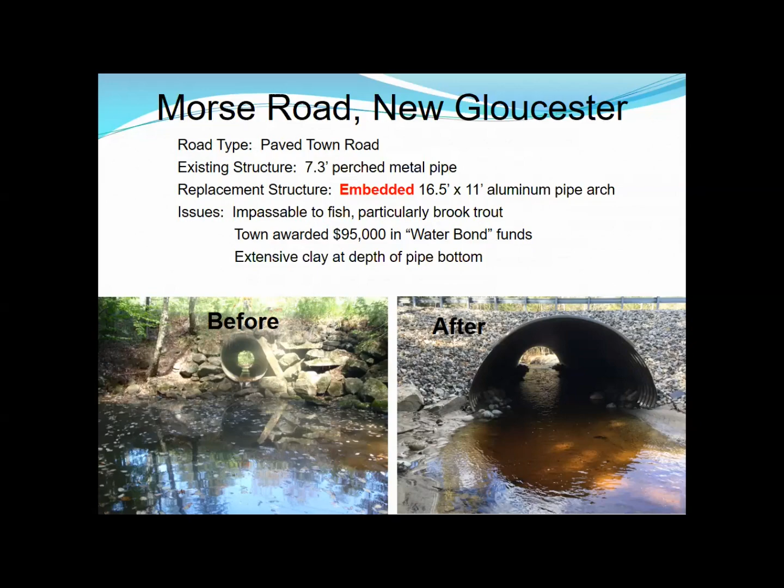It was 16.5 by 11 feet. They embedded it, filling about a third of it with natural substrate from the area, in order to create this StreamSmart crossing, which spans the stream, has the elevation set appropriately, has the slope that matches the stream, and has substrate in it. It even has some dry banks on the inside, and is no longer a barrier to fish.

This is an example of a project in Starks. This had two metal pipes that were skewed inappropriately in relation to the road. They were not aligned with the stream. They had multiple problems, and the pipes were failing.

You can see that they're perched. There's no way fish could get through these culverts. It's another project that was funded in part by the DEP Culvert Grant.

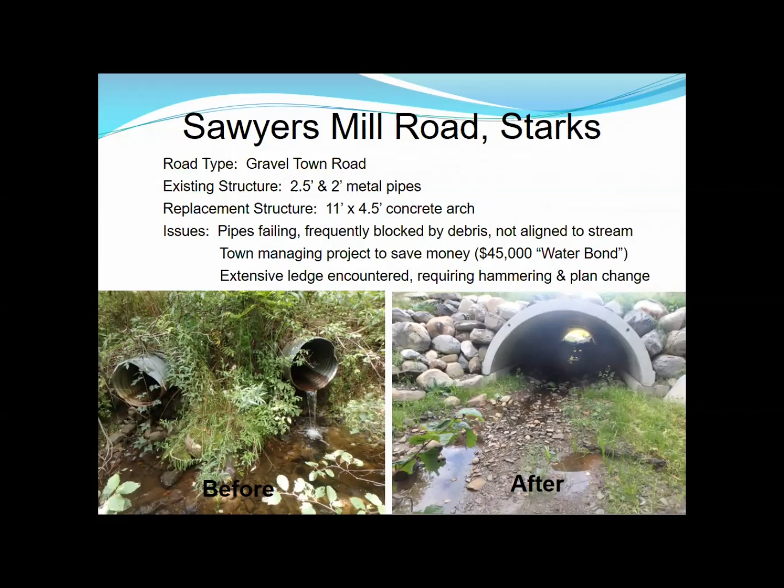With this project, they replaced it with a concrete arch, and what they found when they got there and started digging was there was ledge that they did not anticipate. So they had to be flexible and creative, and they were able to put in a great structure, but they had to make some changes on the fly and have some flexibility in moving money and equipment and people around to make it happen.

Here's another project in Phillips. Again, a small metal pipe with an overflow pipe set higher up. This road was failing, the culvert was failing, was falling apart.

And they put in actually an embedded concrete box. So this is not a three-sided structure, this is embedded. They had to set it down low enough to be able to fill in a significant portion of the box with natural substrate, and then there are banks built on the sides.

This was one that was a bit of an emergency project. Normal work window is July 15 through the end of September. That makes you work during the low or dry flow season, low or no flow, and it also was to protect any Atlantic salmon in the area or brook trout or other species. But because it was an emergency, they had to work outside that window with appropriate permission from the regulating agencies.

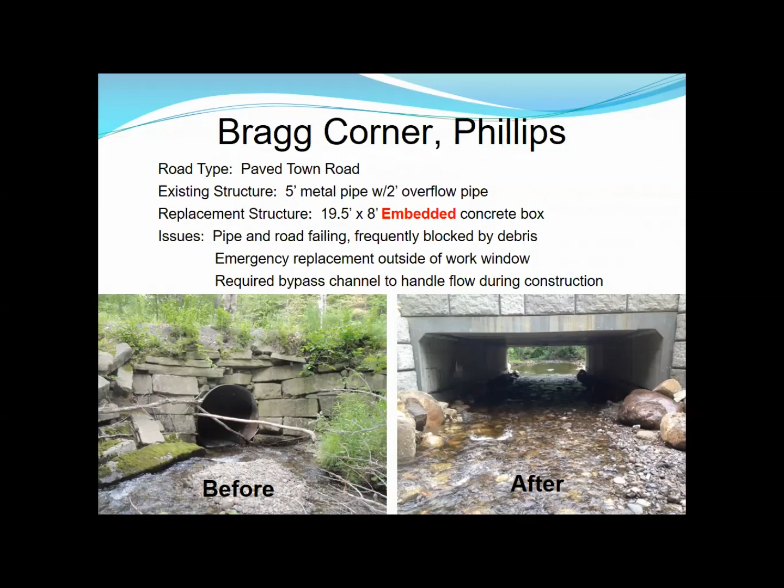There was still so much water that they actually had to create a bypass channel to handle the flows during construction. So this was one that was a bit more difficult of a project, but it came out fantastic. They were again able to be flexible, working closely with the regulators and with all the agencies that required it.

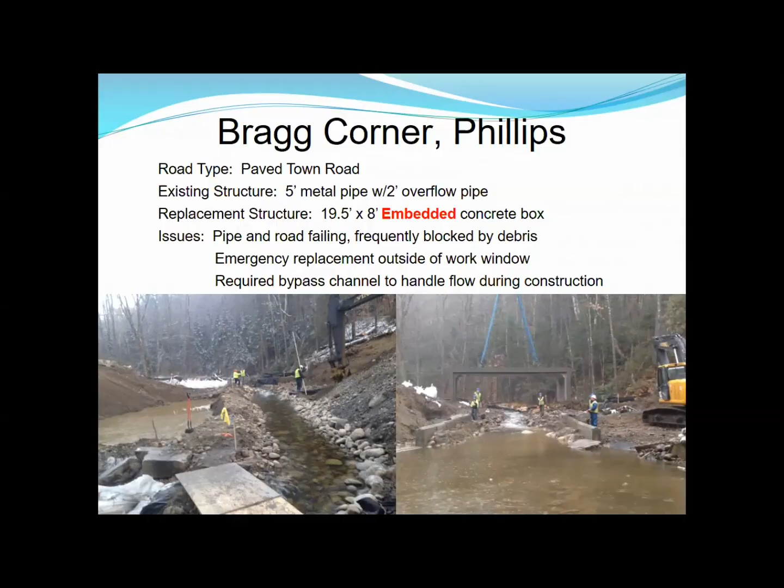Which brings us to some of the things we need to think about when designing and installing these StreamSmart crossings. You really want to have all your ducks in a row, as much information up front. You don't want surprises once you've got equipment out on site. Start talking to your regulating agencies as early as possible. If you're doing a StreamSmart crossing, they're going to want to help you and guide you through the process. Make sure you know what's expected and that you have all your permits in hand before you get started.

Understand your in-stream work window, usually July 15 to September 30. You can occasionally get extensions, but it depends on the stream, and sometimes they will not allow for extensions. Make sure you have everything ready to go so you can get your work done in that window. That window puts you in the low flow or no flow time of year, when you'll have the least amount of water coming through, hopefully, but there may still be water in your crossing area. You need to control that water during construction, by pumping it around the work area or with a bypass channel like we just saw in the last example. There are ways to control the water, but it's not something to take lightly, and it is something you should have a plan for.

Along the same lines, you need to pay attention to your sediment and erosion control. And with the weather, make sure you're not opening up the ground right before a torrential downpour. Make sure you know what's coming, you have good sediment and erosion control, and that you have lots of extras for that inevitable, unexpected storm. Make sure you have extra silt fence and extra pumps for water control, because you don't want to be searching for that stuff in the middle of a torrential downpour when you have the ground opened up.

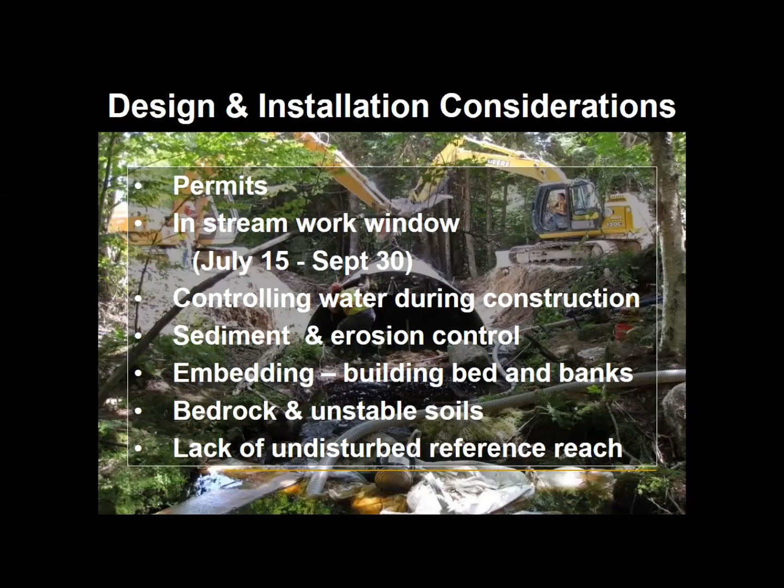One of the other problems that often comes up in collecting our data for these stream crossings is an inability to find an undisturbed reference reach. You go 200 feet from your crossing and maybe there's another culvert, so now you're in the influence of that culvert, or there's a tributary, or you go into a large river, or the topography changes dramatically. It can sometimes be difficult to find the undisturbed reference reaches you need to collect good data. Just collect as much as you can, do the best that you can, and confer with others to get some agreement on the best way to move forward.